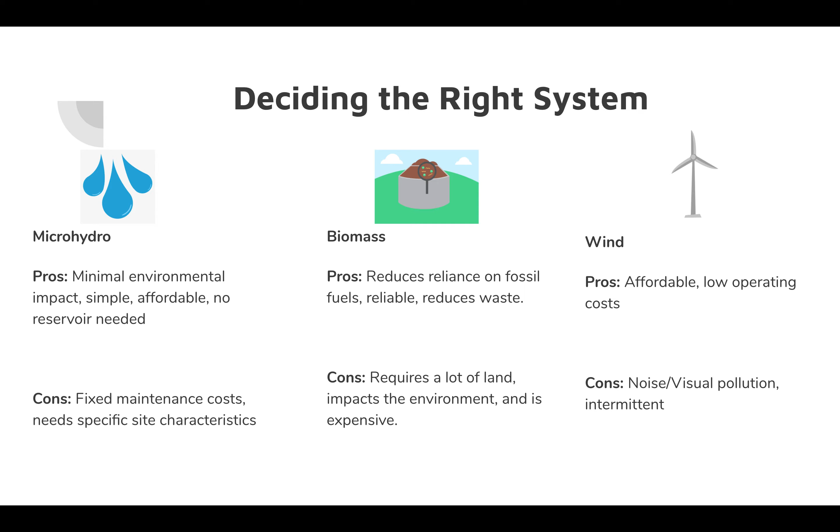For this client, we're going to go with a micro hydro system. This system uses the natural flow of water to produce energy. The reason I chose microhydro against wind and biomass is because it has low to no noise or air pollution, unlike wind turbines, and it also has a low environmental impact unlike biomass. It is also efficient, affordable, simple, and lets the client live off-grid.

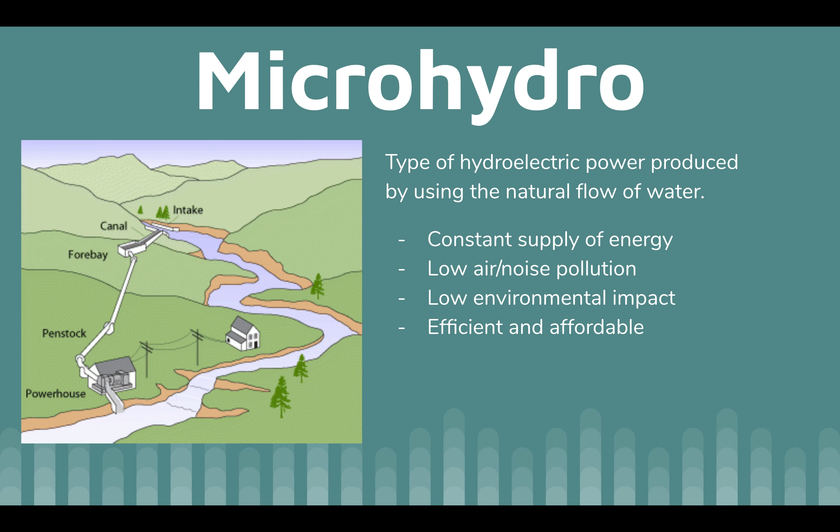I recommend that the client move to somewhere in Watauga County, North Carolina. This region is sloped with many bodies of water available. It is a mountainous region and has up to 135 streams, which provides a safe haven for a micro hydro system.

This beautiful region also has popular towns such as Boone and Blowing Rock, but this county also has space for rural living if the client chooses so. It is also located alongside the Watauga River in Tennessee, which crosses over to west of North Carolina.

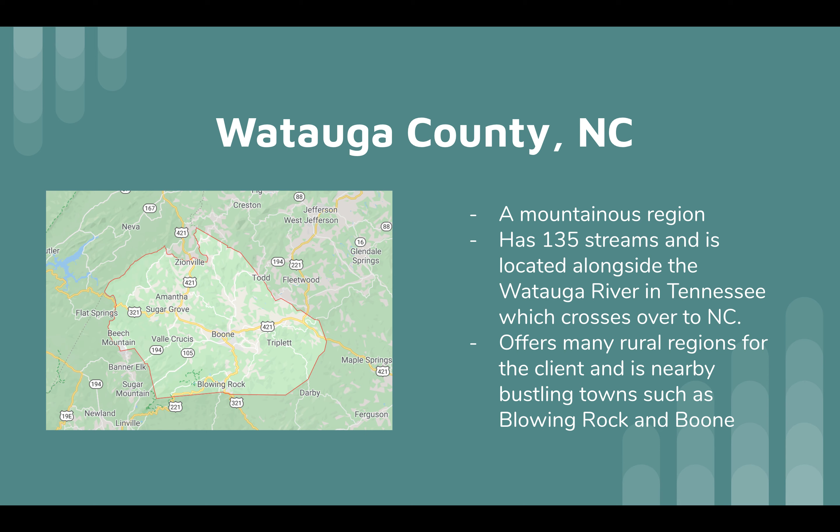Listed are all the components necessary to build this system. First, we have the intake where the water is pulled away from the stream and into the system. This goes to the penstock where it develops pressure, gets taken to the powerhouse, which houses the turbine, where kinetic energy gets captured, which then generates this energy,

ending the process. The system also can include a tail race and a balance of systems, which includes the controller, a battery bank, which won't be necessary for this case, disconnect, a dump load, and a meter.

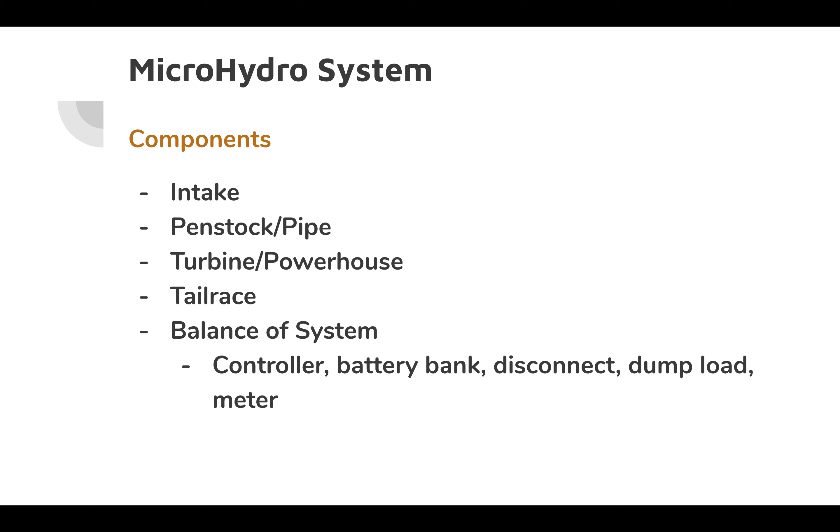So in order to succeed, the most principal parts of this system are the head and flow. The head being the elevation difference between the source of the water and the turbine, which is typically measured in feet, and the flow, which is a measure of moving water, typically measured in gallons per minute.

So to estimate how much power this system needs to generate, you need to multiply head and flow and divide it by 10. 840 watts was calculated from this, and by calculating this with 60 minutes, 24 hours, and 365 days, we get 7,358,400 watts, which converts to 7,358.4 kilowatt hours annually. So that is how much the system should provide, with a flow of 14 gallons per minute and a head of 10 feet.

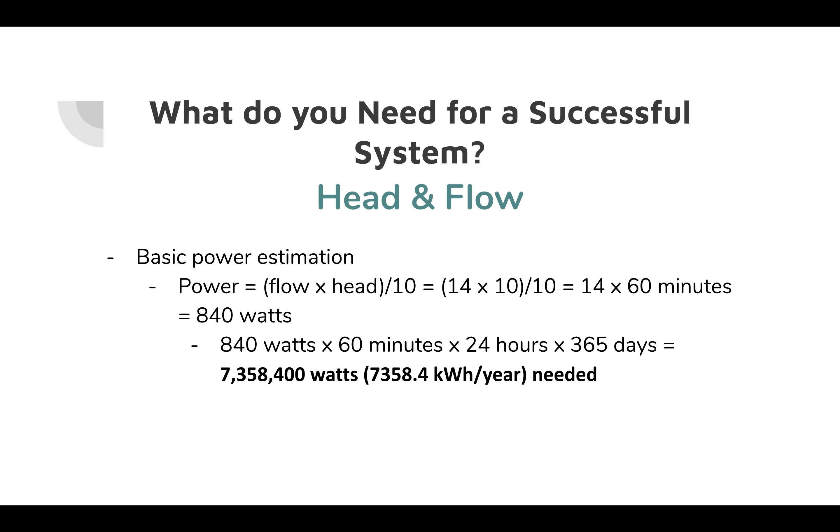So for the penstock design, I recommend it to be made of PVC or plastic because of its simplicity, and for the diameter to be 4 inches, which is the optimal size. This should end up costing around $1,000.

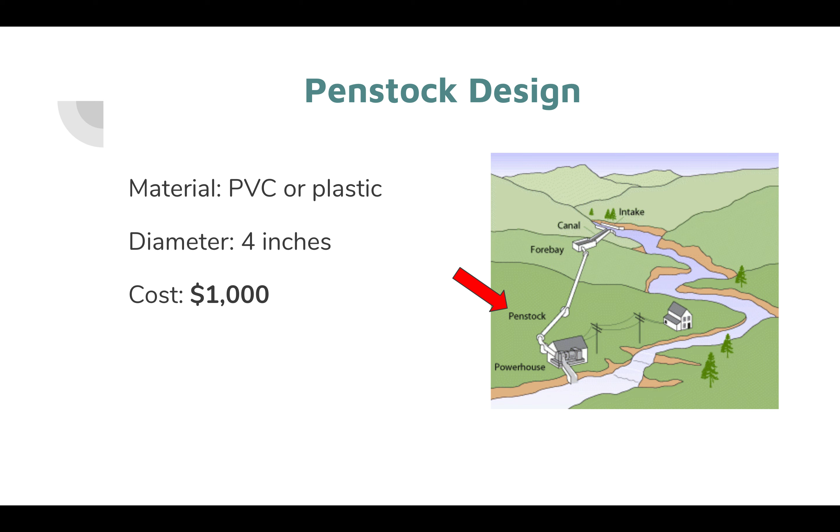I recommend an open-ended pipe with a settling container for the intake because it's easy to clean with access, low maintenance, and affordable. This can range from costing $30 to $400, so I'm shooting for the median to be safe, which is $185.

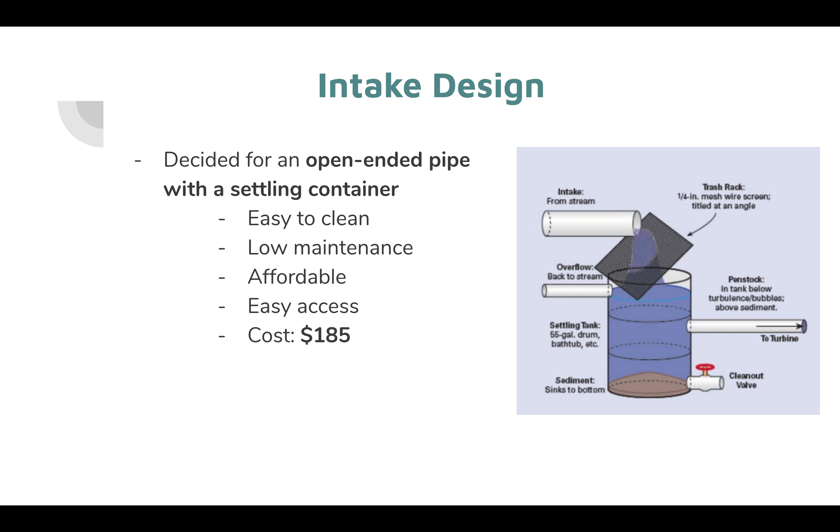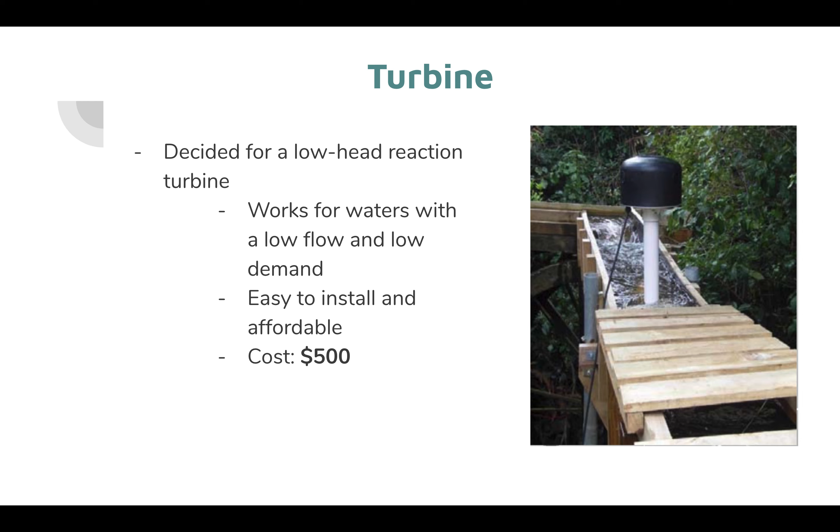For the turbine, I decided on a low head reaction turbine because the client system will be low flow and also have a low demand. It's also easy to install and the cost is at $500. So installing this system will cost the client around $2,000. The client could lower that price by self-installing some parts of the system, but it is always best to leave it to the experts if you're unsure.

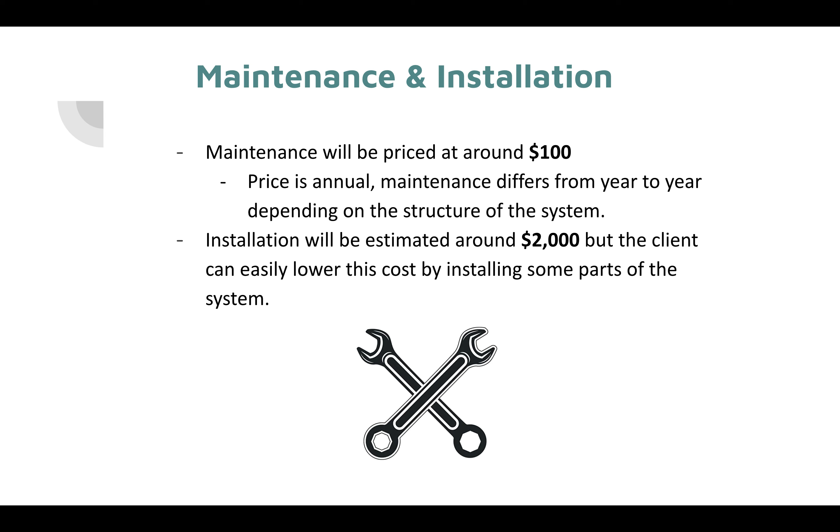Maintenance will occur annually with an average cost of about $100 depending year to year. So these costs are all relative estimates depending on the size, length, and type of some of these elements. So for penstock, its estimate is to be around $1,000. The intake is $185, which was the median range. The turbine is $500 due to the selected type of turbine.

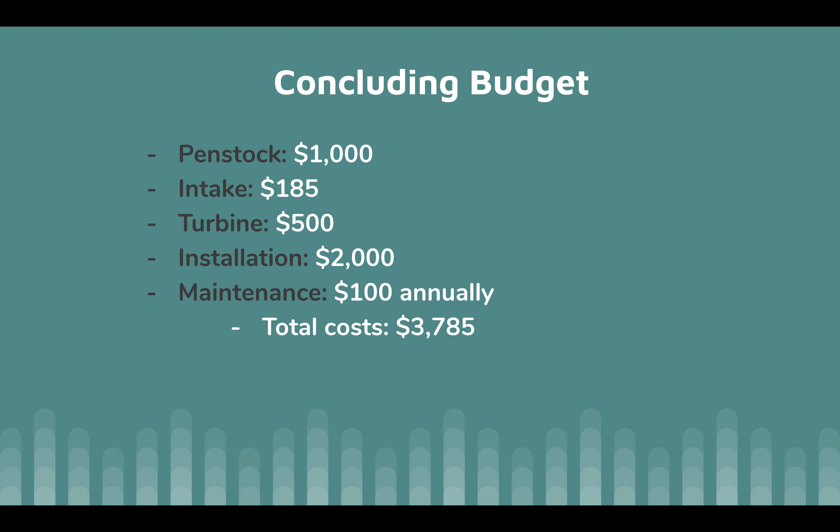And the installation is approximately $2,000 with the yearly maintenance of $100. So in total, the client system approximately costs $3,785. While you won't gain any profits or break even in the first year and a few years after that, there are some incentives to consider.

So first, there is the NC Green Power, which offers to pay a premium price for hydropower that is certified environmentally responsible or low impact by the Low Impact Hydropower Institute. Secondly, North Carolina offers an interconnection incentive with Duke Energy. This allows you to connect to and supply the grid with power coming from your own system.

One thing to point out with this one is that the client did state that they want to live off-grid, so this might not be best for their interest. There was a renewable energy tax credit available offering 35% of an incentive to renewable energy owners, but unfortunately that did expire in 2015.

Sadly, with our new presidency, many incentives for renewable energy systems have been cut back, but it is possible for the client to find more incentives for their solar system since that source of renewable energy is much more popular in the US, is much more encouraged, and so it has a better chance.

That is the end of my Capstone project presentation. My calculations are also included in this post, along with my sources.